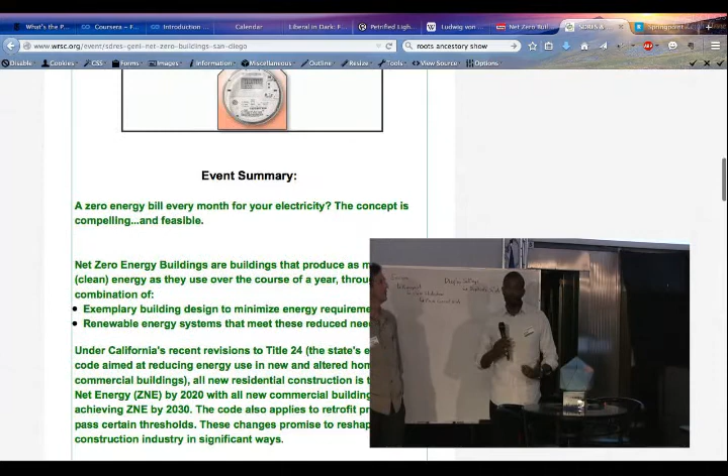What would you like to say to these people to welcome them and tell them what Renewable Energy Society is? San Diego Renewable Energy Society, like Peter mentioned, we're embarking on making San Diego 100% renewable. We're always looking for people to get involved and help us out with the initiatives that we're doing. So if you are interested or know anybody who is, please direct them to our website, it's sdres.org, or you can email me at chair@sdres.org, and we'll definitely have things to do, and we thank you all for coming out.

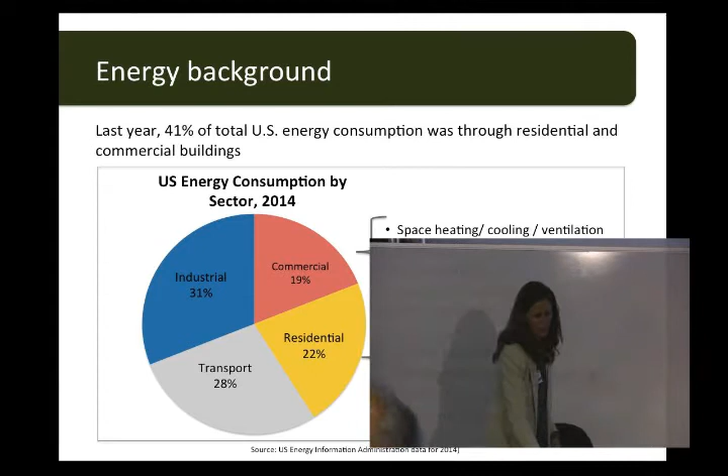Zero net energy buildings are buildings that produce as much clean energy as they use over the course of a year. That's done through two things: one, through different building design to minimize the energy requirements, and Beth is going to tell you more about that. And obviously through renewable energy systems that meet those reduced needs.

Today there are different organizations looking at how many zero net buildings there are. Right now there's more than 150 commercial buildings that are zero net energy in North America. The number of projects is going up. It's not huge yet, but it's growing.

A few data points I found interesting: the first is that 24% of the projects right now are renovated existing buildings. So zero net energy buildings don't all have to be completely new buildings, they can use existing buildings. What's also interesting is that most of these buildings use about a quarter of the energy that average buildings use. That's a big improvement without having to put up solar panels yet.

They can be in all climate zones. We have them here, but you could also have them in winter areas. And they're found in 16 types of buildings, where education is actually one of the most often used ones.

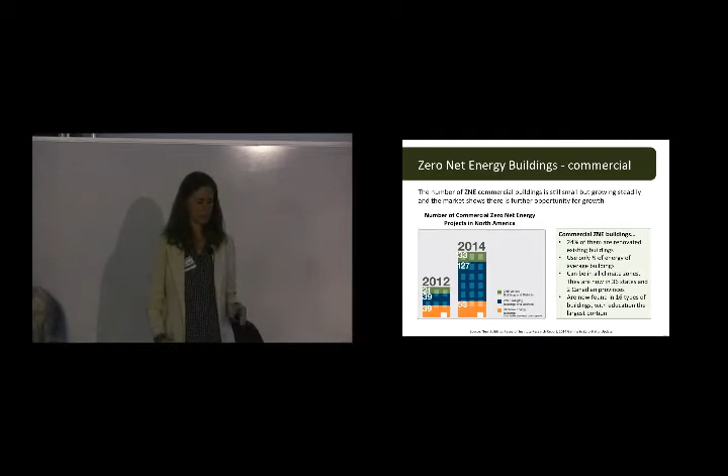In San Diego, we have a few zero net energy commercial buildings. I think the first one, in 2009, this architect firm Hanna Gabriel Wells built their first zero net energy building. They used an existing building, and more than 90% of the materials they used were already there, so they didn't have to set up a whole new building. They use 100% natural ventilation, with design elements and solar panels at the same time.

The second notable office was the DPR construction office. They also used an existing structure, a 1984 structure, and used 95% of it. They managed to change the design to make it a zero net energy building.

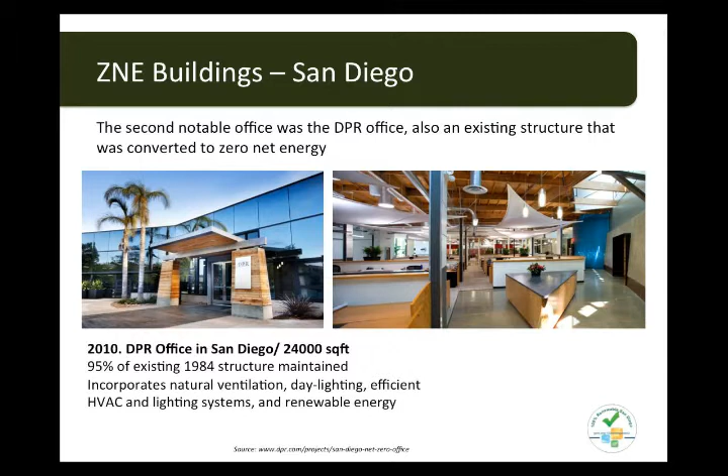And then, most of you must have heard about this: the largest net zero energy commercial office in the country is here also, in San Diego. 13 stories, 415,000 square feet. So it's a big project, and it gives us hope.

In terms of residential buildings, I wasn't able to find statistics on how many there are because people have their own homes and they're not all recording everything. But we see them coming out in the news more and more. There's one in Denmark, there's one in San Diego, there's a few others, there's even an apartment complex, and there's even a community that's supposed to be net zero being built at the same moment.

California is playing a leading role in adopting net zero buildings. If you go online and look for net zero buildings, you see California buildings come up all the time, so that's great.

Through the revised Title 24, there are new goals, and these goals are very ambitious. All new residential buildings are supposed to be zero net energy by 2020, that's in five years, so that's great. And all new commercial buildings should also be zero net by 2030, and at the same time 50% of existing commercial structures should also be there. In my view it seems very ambitious, and I hope we'll get there, and I think it's possible also.

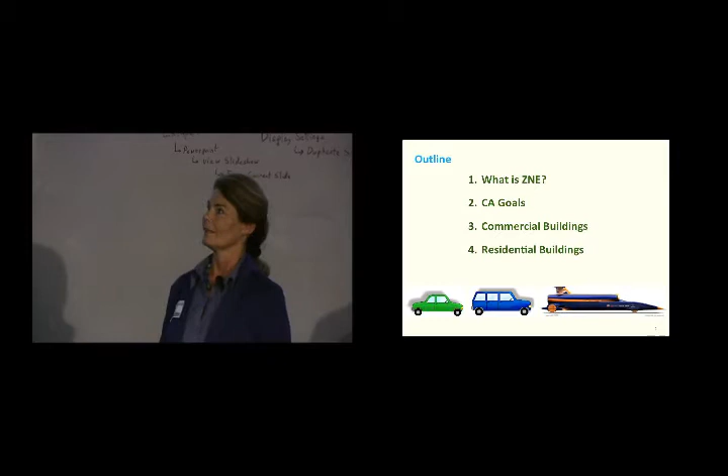Then we'll talk a little bit about commercial buildings and a little bit about residential buildings. If you have questions or clarifications along the way, please shout out. Otherwise, we've got a lot of material to cover, and we will have more questions and discussions after all 3 of us have had a chance to talk with you a little bit.

So let's start with, what is high performance? We talk about ZNE and high performance buildings. You will often hear me say that the path to high performance and the path to ZNE is the same path - the question is how far down that path you go. And what is a high-performance building?

So we've heard about the triple bottom line. I think it's always valuable to remember that it's not just about energy, but this is really about the quality of the building for the people living in it. There's a lot more we can talk about that. We want healthier, and those come from a combination of happier people and lower energy costs. This translates into, of course, a healthier environment - we're polluting less, we're taking less from the environment around us, and in an ideal sense, we're actually contributing back to the health of that. So that's why we talk high performance instead of just high efficiency, because high performance buildings are looking at the entire triple bottom line - healthier people, healthier places, and a healthier planet.

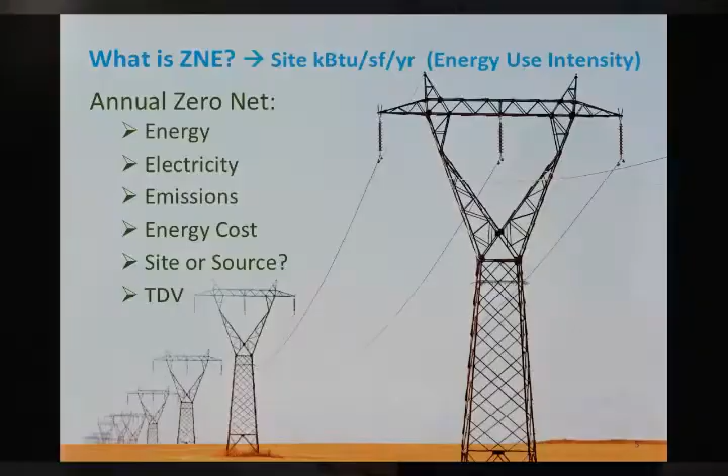What most people look at is a metric — here's the geek part of it — it's site-based KBTUs per square foot per year. We're going to simplify that and call it energy use intensity. The industry calls that energy use intensity, EUI. That is not the definition that the state of California is using for its big, bold goals, but that's the definition that we're mostly using when we're designing for zero net energy buildings.

Other things that you hear in the ZNE conversations — as you looked, Bryony put up a slide from the New Buildings Institute. They are tracking projects that are verified to be zero net energy, and they're using this EUI definition.

And to be verified, it has to have been in operation for at least a year. Most of the time when we're talking Title 24, we're talking about design of buildings which haven't been built or occupied yet. So verified means a 1-year real utility bill that identifies the performance of that building.

We also might be ZNE capable, or ZNE capable might be a building design. As we'll see in our next set of slides, a building can be prepared zero net energy, but then the people in that building might operate that building in a higher intensity way than another set of occupants might.

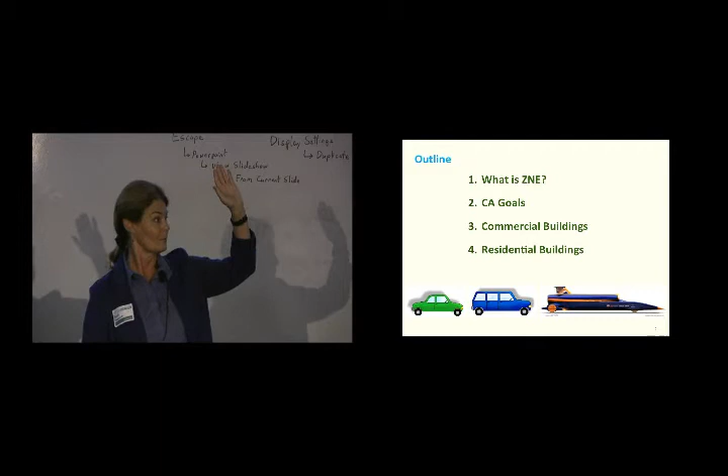If we look at our cars, how many people own a car? Most of us. How many people know when you bought that car what its factory gas mileage rating was? How many MPG was the factory rating for that car? When you had that MPG, did that tell you how many dollars per month it's going to take you to operate that car?

So you can have a building which is designed to be ZNE capable, which is like a factory rating for a building. But then how is that building actually going to operate in real time and in real life? That's like, how do you actually drive your car? How many miles, how much load, how much maintenance do you do on your tires and keeping your engine maintained and efficient? That's a very similar example when we're talking about buildings.

We can solve it at the building scale or at the community scale, and if we can't solve it at the building scale for offset of renewable energy, then we have an option under some metrics to go outside and buy, in effect, renewable energy credits. So let's say on my site it's too tight, I can't put up enough PV on my roof to offset the electricity of my building. So I'm going to buy some portion of someone else's renewable energy somewhere else. That's called a renewable energy credit, so the electrons balance out, but not on the site.

And then ZNE verified is when it's actually been proved after a 1-year period of time.

Brianna already talked about the big, bold goals for California, and you can see that this is just emphasizing that there's our new construction goals and the existing building stock goals. I think new construction is crucially important, because what it identifies is what's the potential of design. If we just look at existing buildings and say, wow, how do we make them better, this just feels like a hill to climb to most people.

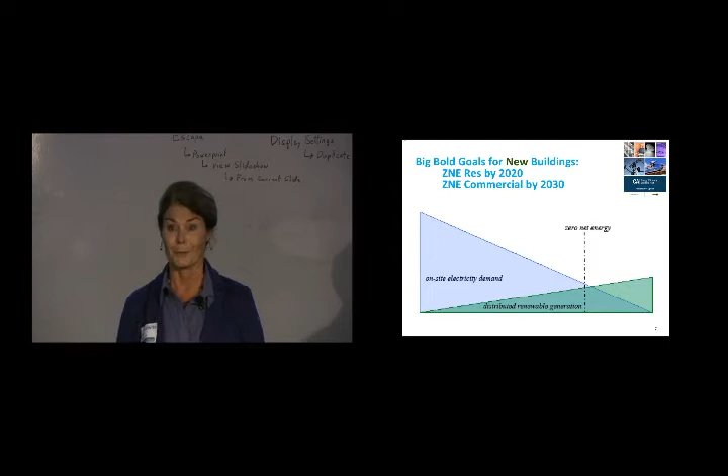How do you retrofit the energy efficiency, drive the efficiency down? How do you take a roof that's already cluttered up with mechanical systems and pipes and get clean space to add renewable energy of any kind? So it's a tougher problem to solve with existing buildings. New buildings show us what's possible. But of course, almost all of the building stock out there, almost all of that energy pie in the country that's being used by buildings is being used by our existing building stock. So what are we going to do about the existing buildings?

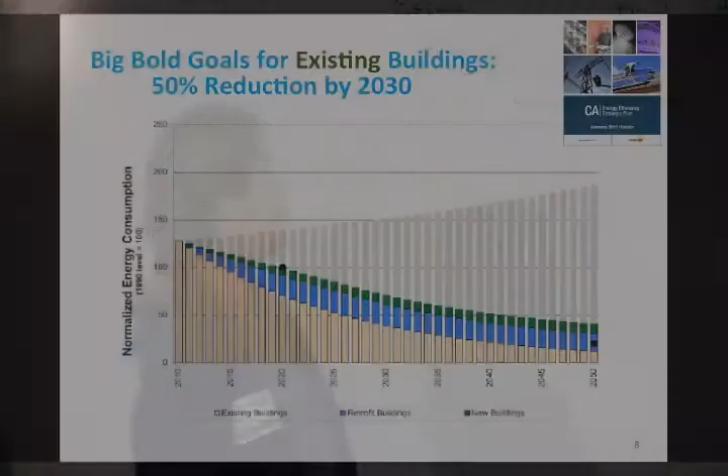Whatever we're looking at, we're going to find the same themes. How do buildings do this? Bryony gave us a look forward. First, we've got the efficiency that's embedded in the design of the building itself: how it's sited and oriented, its geometry, its openings. Then we have efficiency that's embedded in the equipment, so here's what the building is before someone comes into it. Then we have the efficiency in operations, a combination of facility management and tenant occupant behavior. Then we can identify what the meter's going to see for the energy use of that building, and we want to offset that with renewables.

Okay, that's 10. How did that happen? You have 2 10s, Beth. No, that's not my presentation—somebody else's. Yeah, these are not from mine. That's what happened, I apologize. That's okay, we'll get that fixed. All right, actually I have 3 10s, 30 slides, right?

This is interesting because it gives you a sense of how much difference it makes. We talked about the efficiency that can be embedded in the design of the building, the design and construction. So let's say that in general, 50 to 60% of the potential energy performance of the building is embedded in design and construction. Then another big chunk is embedded in the operations—how well that facility is maintained and controlled and kept up. And then another big chunk is the way the occupants use it.

So just to be aware, when we're talking about zero net energy buildings, part of what makes it tricky is that the design industry is used to dealing with the design piece and not knowing much about the operations piece at all. And the building stock—we tend to focus on maintenance and not pay that much attention to the occupants. So just be aware that all of these pieces need to come together to get the most cost-effective options.

And when we can't get the most cost-effective options, then we're still going to do what John suggested and say, okay, so where's the real world number that we can get? And that's the number that we need to offset.

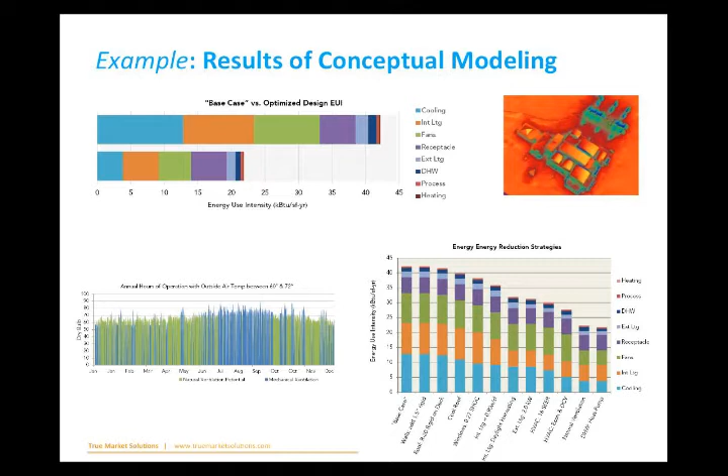If the glazing is improved, can the air conditioning system be smaller? If something's at the end of its useful life, that's the time to change it out, not just to the code minimum, but to something more efficient as a package.

This is part of a natural ventilation study. This is part of identifying how much insolation is available on that site so we can identify its potential for renewable energy.

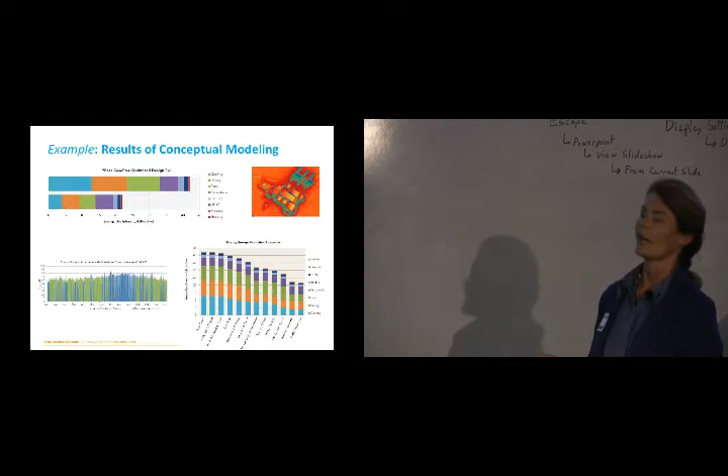This is calibrating the model to the actual utility meters. Once we have a good match, we can translate that into the end uses so we know for that building, with its real occupants, its real weather, all the things going on in that building - not just what the meter sees, but which part is heating, cooling, lighting, fans, receptacle loads. Then we know what's important to look at, and we have high confidence that when we start changing things, those cost savings will be what was estimated.

That's just so I know they can't see that from far. At the bottom here, I see kitchen and IDF - that would be a data server, and this particular building had a cafeteria. Energy model walk-ins and a receptacle, heating, cooling, lighting, exterior lights, under counter lighting, fans, pumps, and DHW - domestic hot water. So that's the levels you see there.

So it's just kind of a peek into the cool stuff that modeling tools can do.

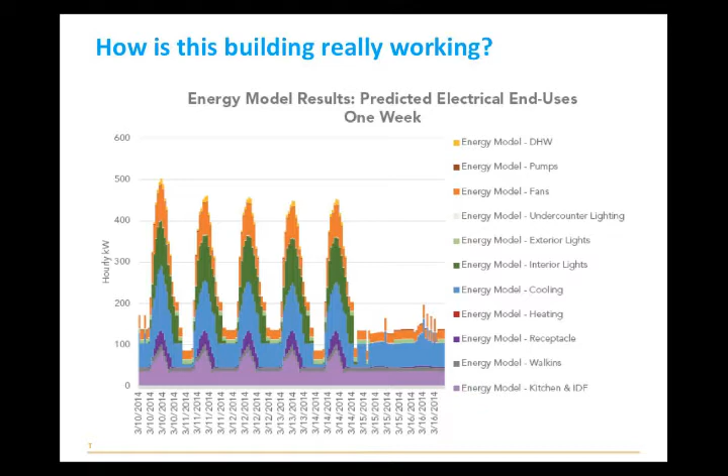This was an actual 4-story building that we did this analysis for. It started out with - remember EUI? What does EUI stand for? Energy use intensity, right. So the EUI of this building, it was a 2007 building, modern current standards, very well maintained, had active facility management, had an EUI of 85.

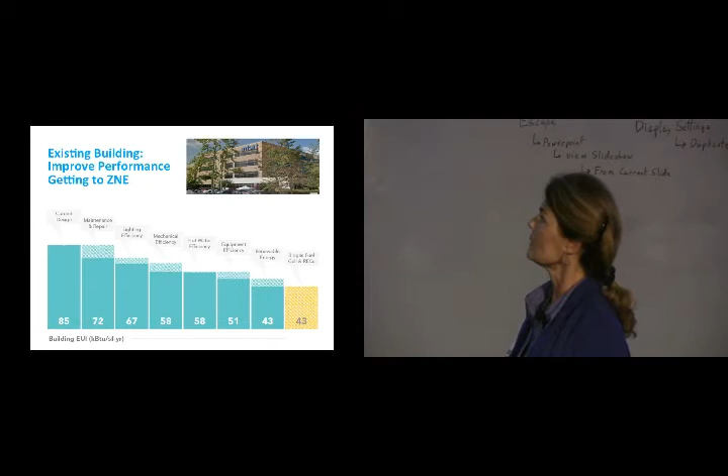With a little bit of maintenance that they couldn't see because they didn't have the right dashboards, they could bring that down to 72. There's other lighting efficiencies they could bring in to bring this down into the 50s. They could do deep retrofits on equipment to bring this down to the low 50s. For energy use potential, they wanted to know what it would take to make the building zero net energy. So these are low-cost things identified just by the process, and these are longer-term capital improvements over time.

Because it's a 4-story building, one thing you might have noticed on the set of buildings Bryony had up to begin with - not every single one, but most were low-rise buildings, 1 and 2 stories. The higher story buildings, there's just not so much roof area. So unless there happens to be a lot of site available somewhere else, most zero net energy buildings you're going to see right out the gate are low-rise, so there's enough physical footprint for the PV panels to be located somewhere.

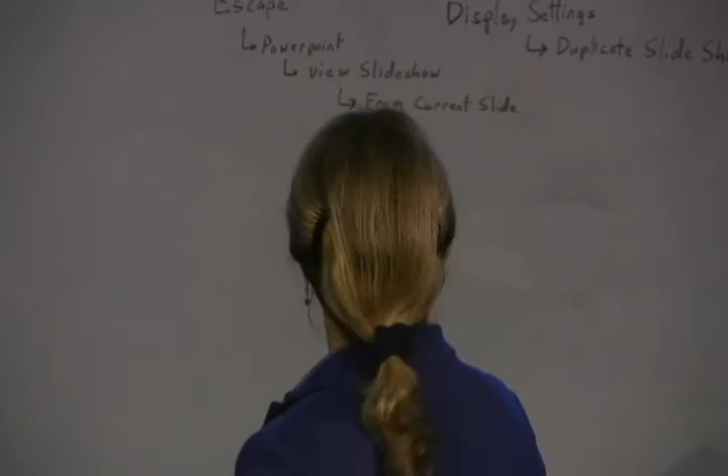And when we get to the clock - let me just say while I'm thinking about it, because I'll forget later - the LPL building you identified in San Diego, the very tall white tower, that was zero net energy. All of these buildings have stories - they have geeks and numbers, but they have stories. The story behind that one was that they were doing it with a fuel cell, which is a great idea. They did reasonable efficiency, then added a fuel cell.

Fuel cells just by themselves are not necessarily renewable. Their plan was to use biogas instead of natural gas for that fuel cell - it's not necessarily even an energy saver, it might be a cost saver. But right now, the state of the industry is such that it's really difficult to get a stable contract to continue to buy biogas over time. So it claims to be a Zero Net Energy building, but it's not a verified one yet. But it's good because it's set up for forward planning, so that when those contracts become available, it's ready to go right into it.

It's kind of like the energy equivalent of dual plumbing your building even before you've got reclaimed water that you can use. I need to speed up a lot here.

This is just a visual example drawn from one of the buildings shown earlier - a 5-story building in Seattle. So how could they put enough renewable energy on their roof to get to zero net? What they did was drive their energy intensity down, down, down, down, because the owner just wanted to prove it could be done.

They won't tell us how much it cost. Most of that cost was frankly in materials, because it was a living building, meaning there were no materials on the red list, as well as zero net energy and zero net water, to your point, Dan.

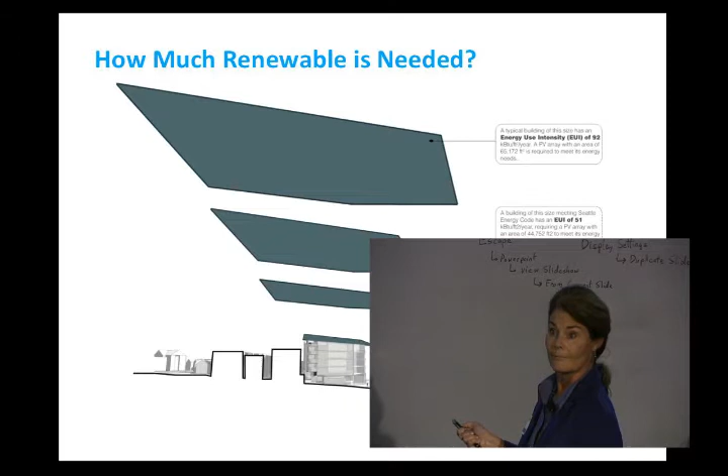But it's a great story, it's a case study. This is the building as it is. This is how much roof would have been needed if the building had been a code-complying building. So this just gives you a graphical idea that by making the efficiency better, the size and cost of the offset renewable energy also comes down, down, down.

This is the HGW building, the first one in San Diego. We helped develop this one. This is an example of another one, an office building. And there's a story there that you can ask about in questions and answers.

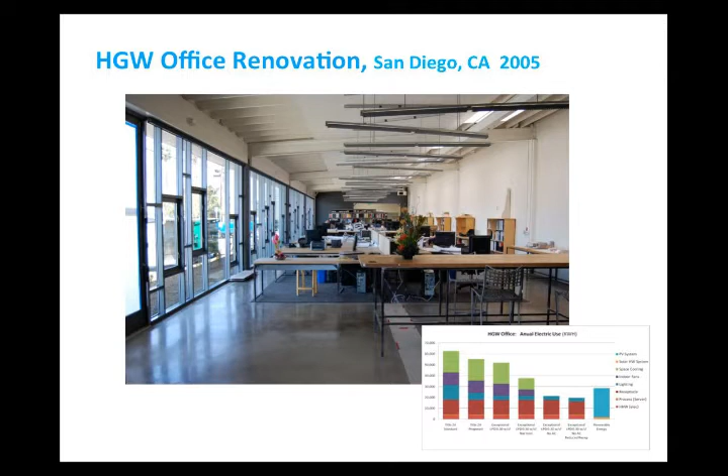The County of San Diego has a strong goal for Zero Net Energy buildings. This is one of the ones they've committed to at this point. So that's just kind of a range of commercial buildings.

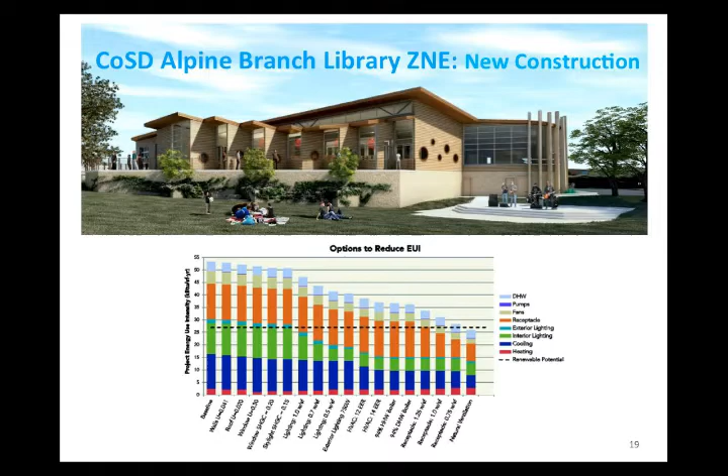I'm going to just stop here. This next set I had was on residential, but the ideas are similar, and we've been talking about these ideas. I want to make sure that Phil and Bill have time, and I want to hear what they have to say too.

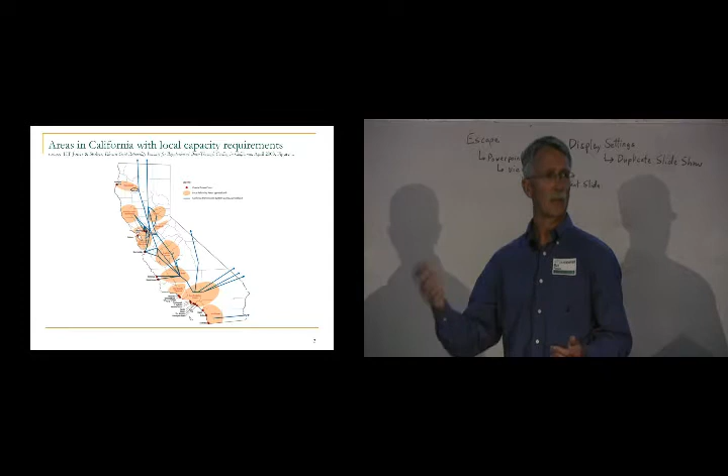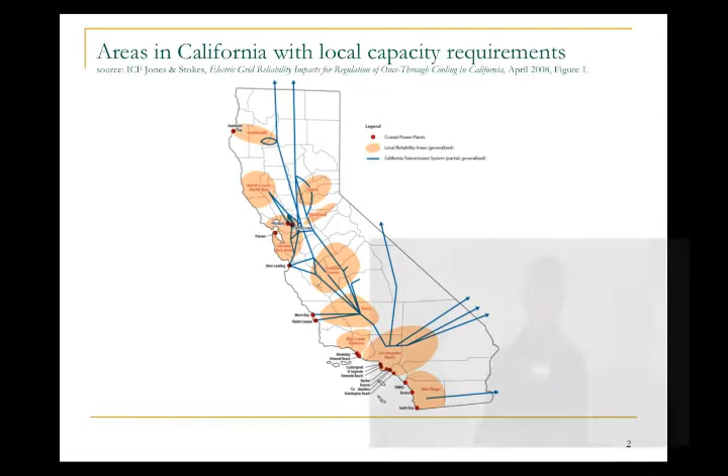What's been happening, and I'm sure many people here are well informed, is there's a major energy debate going on even in our own county about building more gas turbines - Pio Pico, Carlsbad. At the same time, we say we want to maximize renewable energy. That's slide 2. Much of the debate at the state level centers around building most of our renewable energy to the right of those two lower splotches, which is the LA Basin and San Diego - putting the renewable energy outside of the load pocket, building it here, building it here, then building transmission lines to get to it, but building gas turbines here because we didn't put the solar there. So there's no solar to help us when we lose the transmission lines on that hot day. That's basically the debate we're having at the state level.

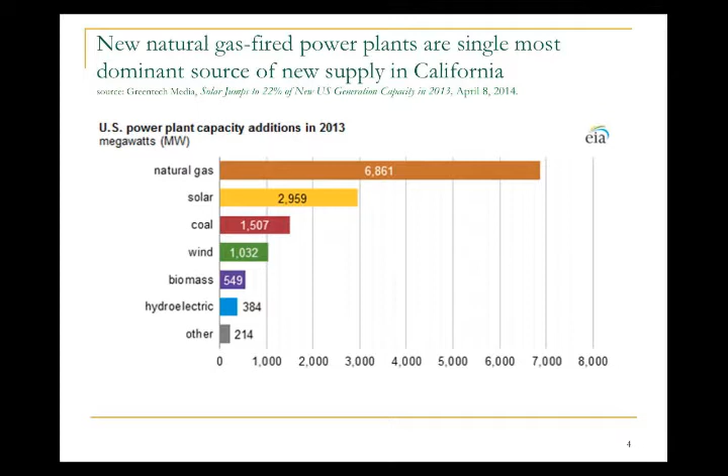And so we get Pio Pico approved, even though most people would like to see a lot more of this - parking lot solar, rooftop solar. This slide, number 4, shows that in the United States in 2013, almost 7,000 megawatts of gas-fired generation were built. Go to the next slide - 4,000 of it was built in California. California by itself is carrying the gas turbine business in the country. We're building a lot of solar - that's what this yellow is. We're building a lot more gas.

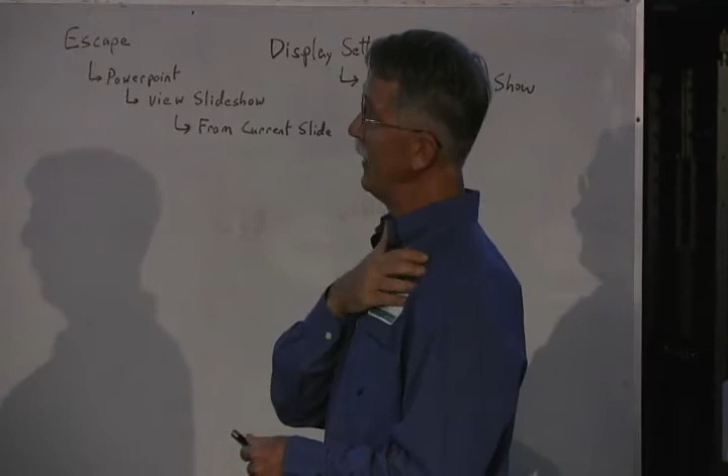And in fact, we're building two separate power systems in California. We're building a completely conventional gas-fired transmission-based system, and on top of that, we're building a major renewable energy build-out. That's one of the reasons our rates are going up so quickly - we are paying for, in my opinion, a somewhat redundant system. I noticed Beth put some transmission lines up there in her presentation, and that's really the opposite of the ZNE model. But what's happening at a state policy level is we have the governor saying we want to go further than 33% renewables, we want to do more than that, and we haven't defined how we're going to do it yet.

But it has a lot of life, and this plan includes numerous alternates. The preferred alternate is alternate 13, but it involves building 13 500 kilovolt lines like the Sunrise Powerlink from these solar development centers in remote areas.

And so this is a serious challenge to the concept of the future, which is based on buildings, on urban solar development. I pointed out already where these load pockets are, and currently we just built a 300 megawatt gas plant right down by the border. We will decide within a few weeks whether to build a 500 or 600 megawatt gas plant at Encina.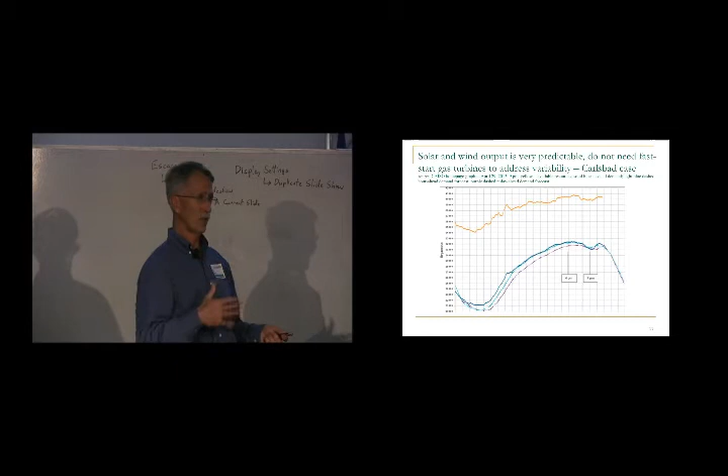You don't need to build that to deal with a load that we can predict 24 hours in advance. And the idea that in San Diego, we're probably approaching 60, 70,000 rooftops with solar spread over 1,000 square miles, no cloud or even a bank of weather is going to have a dramatic impact on our output. It's too diffuse at this point. So those are red herrings as far as the gas turbine need.

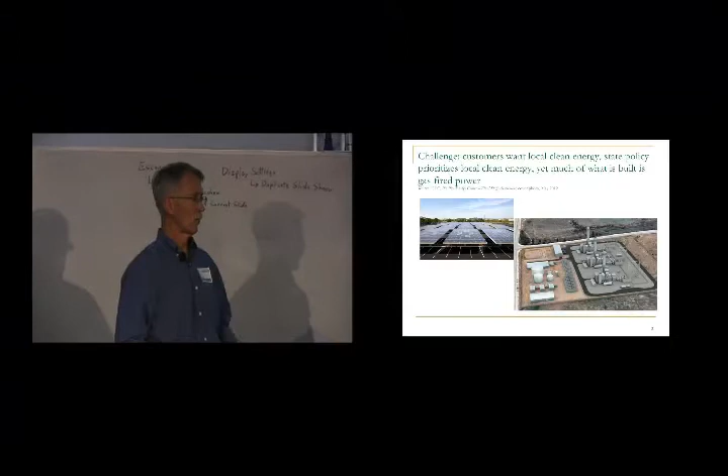Isn't Tesla working with that, making new lithium batteries that will actually store your solar so you don't have that problem? That's also an excellent point.

In the case of Encina, where the commission I gave testimony in this case, the commission's supposed to make a decision in a week or two whether to go with a gas plant or say no gas plant, we're going to punt back to the loading order. And we want SDG&E to review bids to do that job with energy efficiency in gas, demand response, or rooftop, or what we say we want to do as a state.

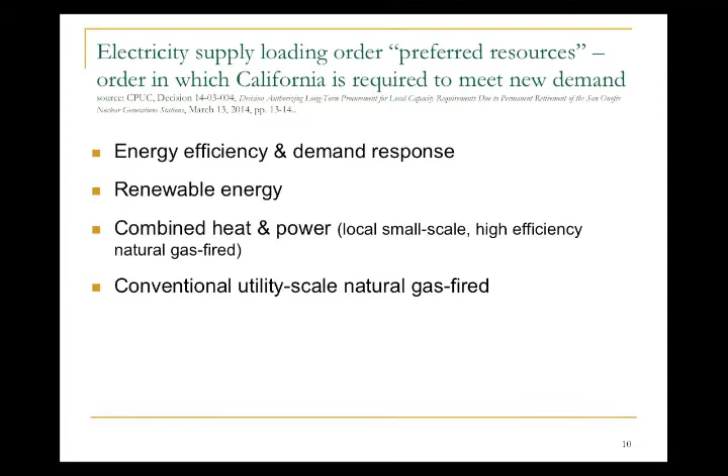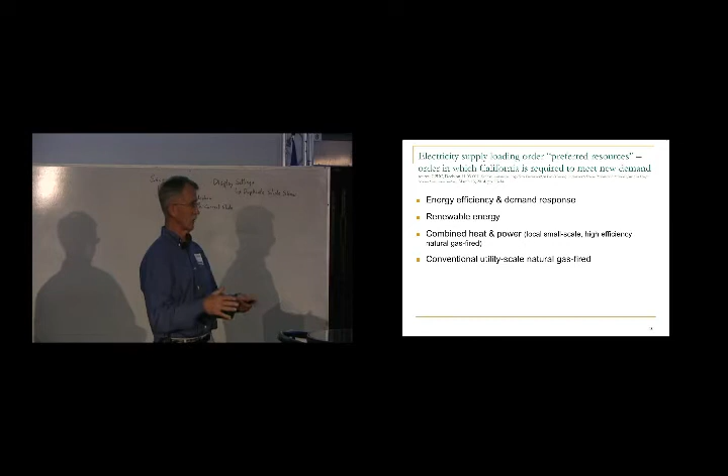And even Shell Energy's testimony was about energy storage and the fact that if you're concerned about wind fluctuations or solar fluctuations and meeting rapid shifts in demand, you don't want a gas plant, you want a battery, and that it should be energy storage. I'll talk about that a little bit later. On a policy level, that's where the state's going, that energy storage batteries, at least at the coastal plants, displace gas turbines. But the politics are still heavily in favor of gas plants.

Well, in an individual home, for instance, I don't know how many batteries you'd have to have, but you use batteries on boats all the time that keep the boats going for 24 hours, no problem, 48 hours, no problem. You have that at your home, don't you, Bill? Yes. So talk about your house specifically.

I actually kept my house out of the slides, just not to be banging the drum too much. But go ahead and brag.

I live over in University Heights, a couple miles from here, but we don't have a feed-in tariff in California so that we could cover our rooftops with solar and feed the excess power back to the grid and get paid some reasonable amount for it. And so since we now have reasonably priced electric vehicles, what I did on my house is set it up with enough panels to cover the vehicle and the house, with the vehicle being the load that is making the batteries pay for themselves.

The way it's set up is, it's not a zero net energy house. We got double the amount of solar production we need to be zero net energy, but half of that at least is going to the vehicle. And the idea is the delta between the cost of a gallon of gasoline and going the same miles with a kilowatt hour of electricity is big. It's much more cost effective to do it with electricity.

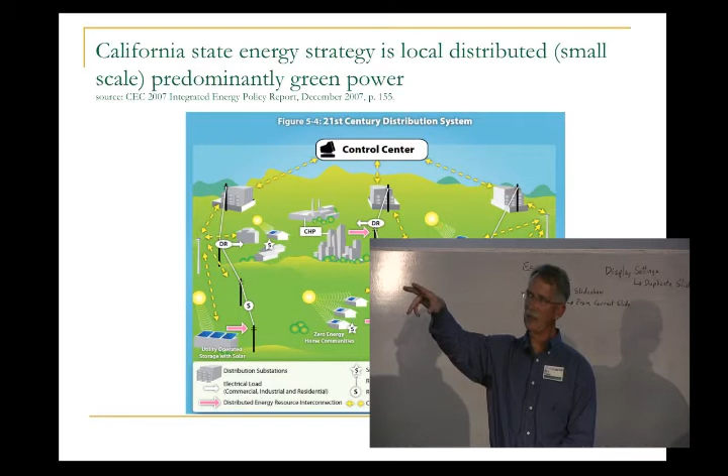Our policy on energy is excellent. For the last decade, state policy has been that we're going to do it at a local level. This graphic on page 13 is from a 2007 California Energy Commission report. It shows solar panels on the roof and batteries, everything we aspire to for a self-contained microgrid approach. The California Energy Efficiency Strategic Plan, which Beth referenced, also covers existing buildings: 25% of existing residential gets to near net zero by 2020, 50% of existing commercial net zero by 2030. That's a very big deal - that's retrofitting all of our existing structures.

Southern California Edison, the utility to the north of us, has a pilot program going now, 300 megawatts, to meet new load in the urbanized portions of their territory adjacent to San Onofre nuclear power plant. The stated objective of this pilot is to eliminate the need for gas-fired generation to cover this same need, so that energy efficiency, demand response, rooftop solar, and energy storage will permanently supplant the gas-fired generation.

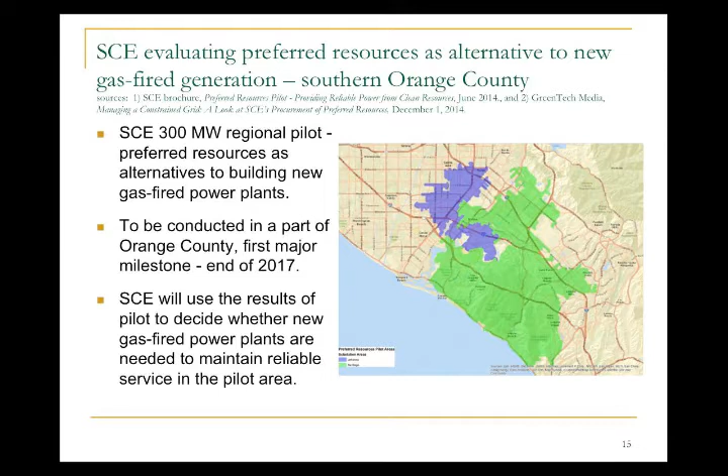Beth also used this graphic showing commercial building net zero energy conversion, where 50% of the building stock reaches net zero by 2030. I used this as the basis for a project I did for the San Francisco Bay Area, looking at what if we keep going. In 2030 we're at 50% - what if we continue at a linear rate and hit 75% or 80% of the buildings? Because we've already got 25 to 30% of our electricity supply as renewable, at about 2035-2036 we hit 100% green, just following that track on net-zero-energy buildings and the existing remote renewables we have.

So we have excellent state policy. The politics and political power are really behind the conventional approach - transmission lines, gas plants - and that's one reason we're building two independent power generation systems: a conventional one that is gas-fired, and another that is renewable energy driven.

However, some recent legislation like AB 327 was supposed to put the silver spike into net metered solar for rooftops. But because the industry and its supporters were strong enough, we tripled the net metering cap with that legislation, and we're now building gangbusters on rooftop solar. That wasn't the bill author's intent - it just was the way the politics worked out.

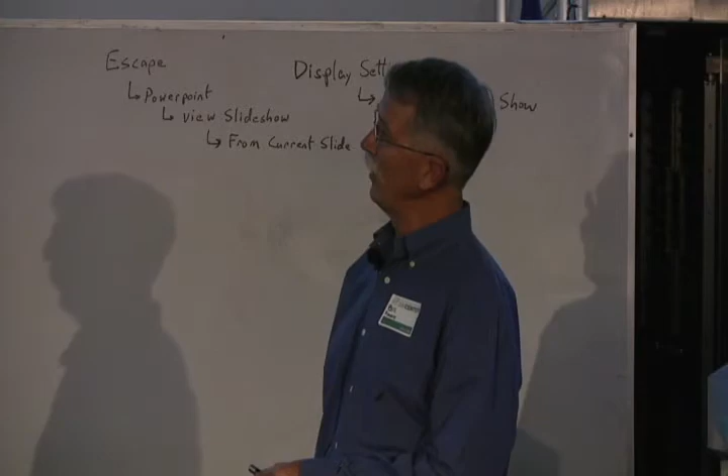If you listen to the radio or the ads by solar companies in San Diego, they'll say you need to move now on your solar project because the law is going to change in a year, things are changing, move now. This law that was passed really bumped up all of these rooftop solar installations, which are a significant part of a zero net energy building.

One thing that isn't well known about this law is it also codifies the idea that this industry is supposed to grow sustainably, meaning when net metering ends, this customer-sited renewable distributed generation continues to grow sustainably, meaning it doesn't just drop at 2017 or whenever we hit that target. That's important to both know and to advocate for, because there will be a lot of pushback to try and ratchet down what is happening.

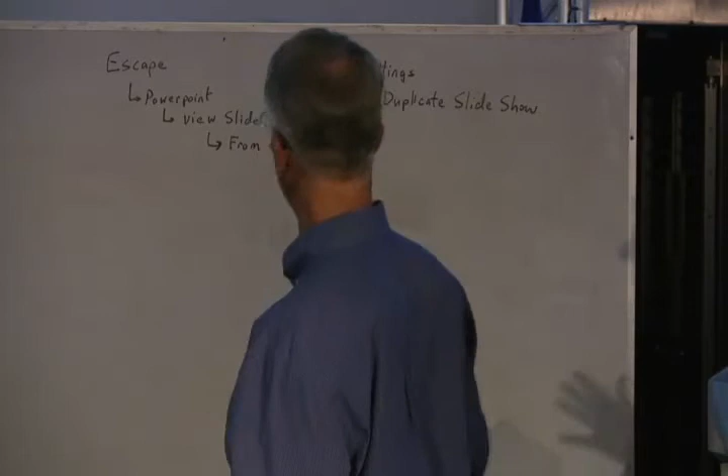Because if it continues at this rate, the zero net energy concept will, just by pure momentum, start to dominate the electricity supply system, which I think would be a great outcome. But there are many battles yet to be fought on that.

The only other major point I want to make is about economics. The main pushback from the utility side is that, well, obviously putting solar panels on an individual building can't possibly be as cost effective as putting it in a 100 megawatt array in the desert. And that's true within the fence line of the array in the desert or around the building. But this is a table I just put together, and it's approximate: cost of utility scale desert solar versus commercial rooftop urban solar. Cost benefit deficit, put it in terms of dollars per kilowatt hour, maybe 1 cent.

2 or 3 cents of difference maybe, advantage desert solar. But if you have to build a transmission line to get there, like the Sunrise Powerlink, it costs $2 billion, and your capacity factor is 25%, meaning 75% of the time you're generating nothing. Then just on a dollar basis, this would be the equivalent of 9 cents a kilowatt hour to get it from Imperial County to San Diego.

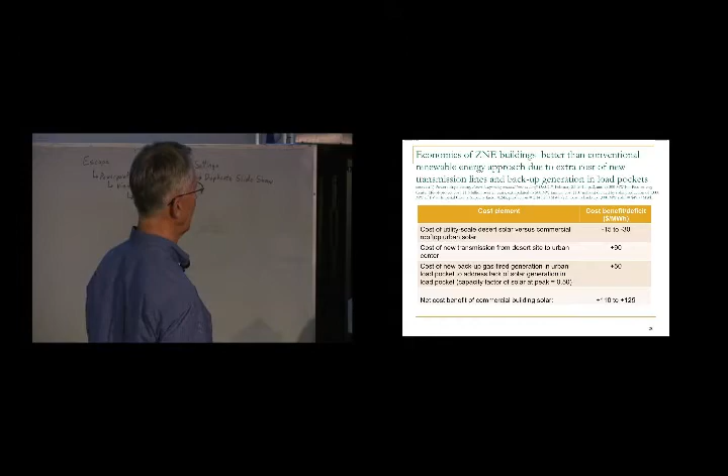If you didn't put the solar in San Diego, so that when you lose a transmission line, you have no power from that resource, and you have to build enough backup generation to cover what you would have gotten from the solar that was on ZNE buildings in San Diego, you add another 5 cents a kilowatt hour to the cost of the solar in the desert. To the point that if you looked at it in the big picture, you would not concentrate on putting solar out in the desert because of all of the ancillary expenses that go with it. So we have this battle going on, but we also have the governor doing some good things.

This January, in the State of the State address, and I think this is in his executive order as well, doubling the efficiency of 50% of the state-owned building stock, and now presumably of the entire building stock in the state. That's a huge step toward zero net energy on a broad scale.

This is just a summary of major legislation on energy storage, battery storage, that is requiring the utilities to put in substantial amounts of battery storage. And really, for these battles over individual gas-fired plants, the preferred resource that is the number one candidate to displace it is battery storage and energy storage.

And entities like Electric Power Research Institute are coming out with reports saying that battery storage is less costly than gas turbines for the same application, which is just building the momentum behind the idea that if we put in new large utility scale systems, they would be batteries and not gas-fired generation.

But the bigger context, and I think many of you are probably quite aware of this, there is a once-in-a-generation controversy going on at the commission, at the state level, the California Public Utilities Commission, that basically controls which way we go on energy. Their president left recently. There are numerous investigations, and what it has to do with is a far too cozy relationship between the appointed commissioners and staff, the commission, and the regulated utilities. That's going to shift this year. It's too big a scandal for business as usual.

This opens up more space for something like the zero net energy concept, which we've had for a decade, but haven't really accelerated to the degree we should based on its status in the policy firmament at the commission. There's going to be a shift this year at the commission, and the playing field is going to level out more than it has in a long time. So it's an excellent opportunity to push on the zero net energy concept for a lot of reasons, economics for one, but also its time has come. The stars are lining up to make it happen faster than I thought, especially with what's happening at the commission. So that's my presentation.

Thank you. The last three up here, if you want to finish them out. The last three are here in San Diego and all over the state, really.

One alternative to the utility providing supply is community choice aggregation. I'm sure most people here are at least somewhat familiar with that concept, but let's assume you're not.

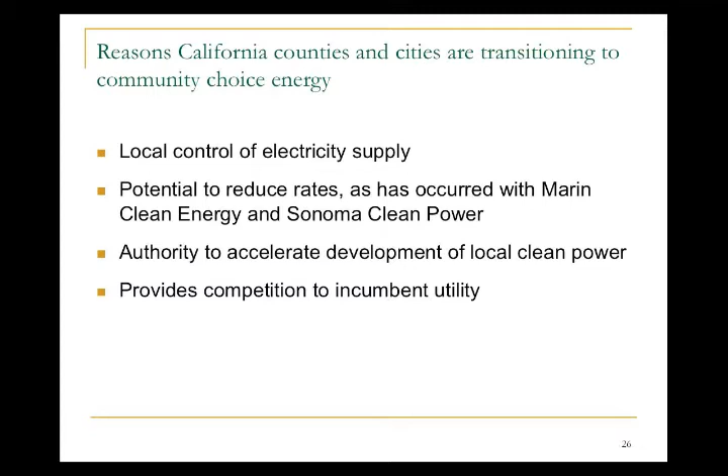Many of you are aware that our rates are going up fast—we're getting hit with major rate increases and shifting of rates. The question is, other than the issue of renewable energy, which the zero net energy concept addresses, why in an era with no increase in load are our rates increasing so fast to pay for things like transmission and gas plants? It's a good question, and this is a tool that would allow us to concentrate more on developing the renewable potential in the city of San Diego.

What is the answer to that question you just posed—why are the rates going up?

Well, the question is, for example, I pointed out the Pio Pico gas plant and Sunrise Powerlink transmission line as examples. We have many major infrastructure projects that are in the pipeline or have been built, and those costs are now in our rates. The reason for mentioning the Utility Commission and for mentioning that we're building two parallel systems—we could shut down all the solar panels in the state today and we wouldn't miss a beat, because we've built so much gas. We can shut down the nukes, we shut down San Onofre, because the commission has been so accepting of very conservative growth projections, and the utilities say we need gas plants, and they go, okay, you get the gas plant. We need another gas plant.

What's the problem then with supporting the grid that we hear about? In other words, what's all that about?

The grid does need support, no question about it—it's a 24/7 grid, but it's the wordplay. I can say this because I've been working as an expert witness there for 10 years. It's kabuki theater where, yes, a gas plant can handle that swing load, but we have many resources available to us that can handle it, and we do it every day. We handle these load changes every day, including what is now probably north of 10,000 megawatts of solar and wind. It's here, and we're handling it with our existing resources. So the game we play at the commission is, why can't we use—this is me talking—we have a 50-year-old gas plant at Encina, 1,000 megawatts of gas-fired generation, absolutely reliable.

Number two, if you want to really have an impact in the short term, all of this is decided at the California Public Utilities Commission. They have the power of God over what direction we go in. They are in a state of major flux at this moment due to scandals that have evolved out of the San Onofre settlement and the San Bruno pipeline explosion.

Who is the Speaker of the Assembly of California? Toni Atkins — this is her district. Toni Atkins wields great power, and Ben Hueso, senator right down the road, is chair of the Senate Energy and Utilities Committee, which oversees the commission. Just let them know that we want transparency. If you get transparency at the commission, we get to a zero net energy future much faster than now.

The problem is, and this happens with many commissions that regulate select industries, they frequently become captive of those industries. That's where the commission has been. But that may not be where it will be in 6 months or a year, due to this. The politics of this is so overwhelmingly significant — it's a great time, if you know Toni Atkins or Ben Hueso or any of these electeds, as they are deciding this week, next month, in the next 3 months, on reform legislation and more transparency. Just picking up the phone and saying 'I want a more transparent PUC' will accelerate this process.

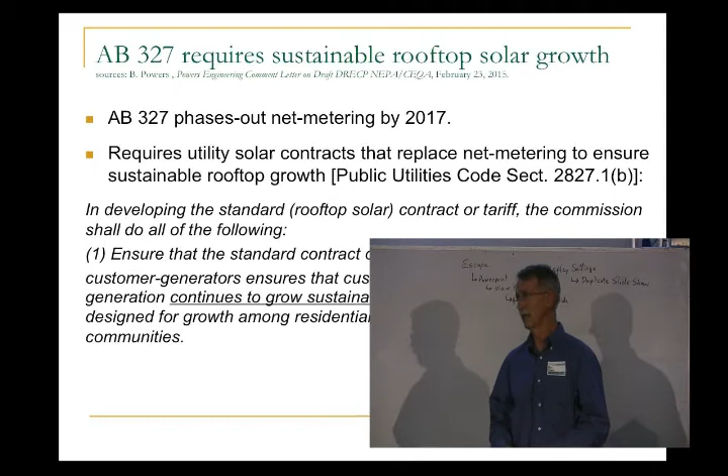One more with Eric on here. Hi, you had mentioned one of the comments you were making spurred some thought. You had said something about the unfortunate specter of building $50 billion in central distribution and transmission infrastructure unnecessarily. Was wondering if you could explain a little bit more about what goes into that number, and also if you could give an estimate - let's say miracle of miracles, right now today the entire built environment in the San Diego region was net zero - what amount of stranded costs would we be looking at in existing central generation and distribution infrastructure?

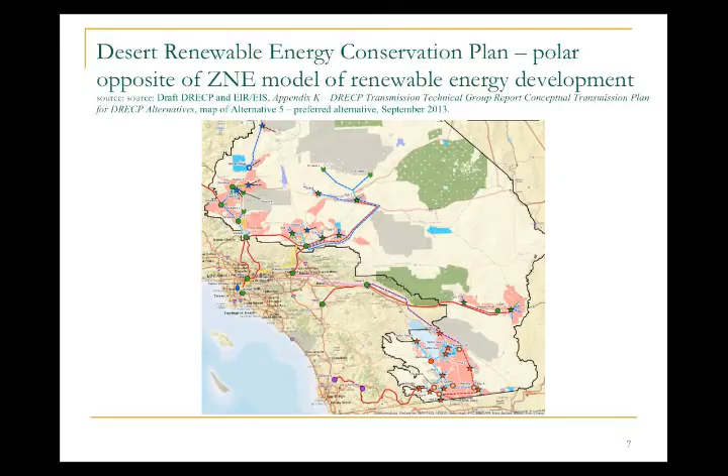I'll try and answer that. The first one is pretty easy. The slide's not up, but in the plan that the state has floated for putting 20,000 megawatts into the desert, they are explicit that this will include either 13 or 14 500 kV transmission lines, new lines. Our experience locally is with the Sunrise PowerLink transmission line that was energized about 2 years ago, and the final price on that was $1.9 billion, approximately $2 billion. So the basis for an estimate of transmission, just the highest voltage transmission cost, would be 2 billion times 13 or 14, so somewhere around 25 to 30 billion. And then that is amortized at 5 times that over many years.

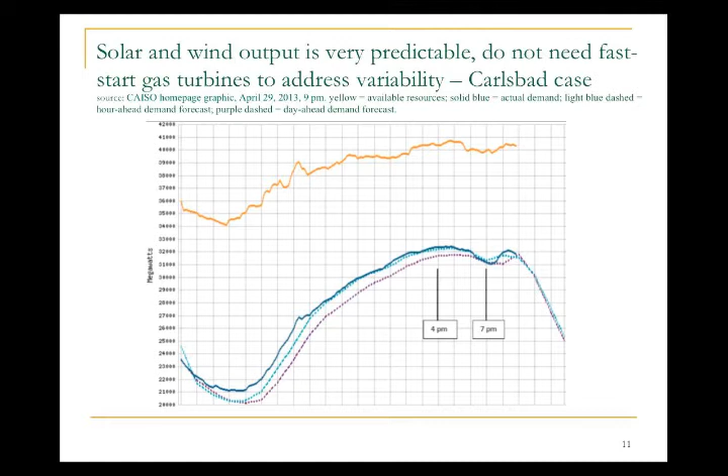The issue of the built environment - say that we shift gears, we don't do any of that activity, and we just build in San Diego to achieve the same effect. If we don't build that, then there's no stranded cost because we didn't build it. But where I would see stranded costs, not so much stranded as unnecessary - if you're going to put 5,000 megawatts of Kyocera panels in a remote part of Imperial County, you could just as easily put that 5,000 megawatts of panels on rooftops and parking lots in San Diego. There's available square footage to do that. You're not stranding that transmission line, but you didn't need to build it if you went that way. So you're eliminating that cost.

The same is true for the gas turbines. If we're putting the solar in San Diego and we accept that the solar is going to be available at some level in the afternoon, say 60% of its capacity rating, then we don't need to build duplicate supplies to cover that 60%. It's going to be there. So I consider all these gas turbine projects in the pipeline as essentially not stranded because they will be used, but it's a fork in the road. You're choosing this fork, and if you didn't choose that fork, you wouldn't have to put the money into it. You just go forward with this leaner, cleaner, less costly route.

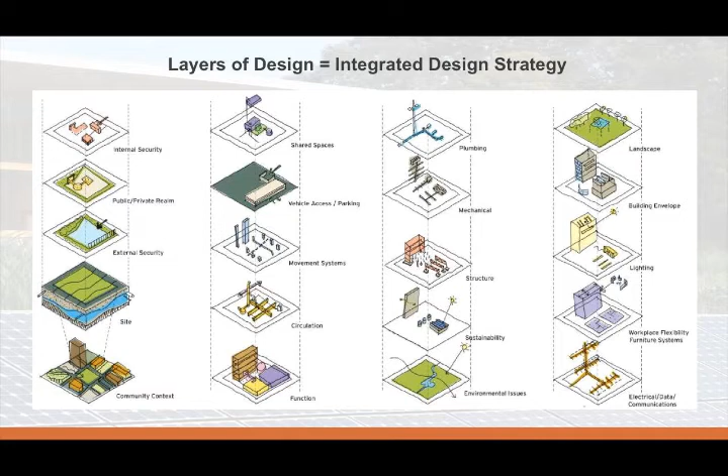We use the philosophy: no one knows as much as everyone. So we are collaborative. When we meet with a client, we bring the consultants in. There's a thing called design build these days that is a forced marriage between the architectural engineering industry and the construction industry. It has very much positive potential, and it can have its struggles. But we bring the whole team together before we start designing. Wherever we can, we have the contractors, subcontractors, plumbers and electricians, because nobody knows as much as everybody. So why not start there? It makes a better building.

We do not seek to imitate nature, but rather find the principles she uses. That's a Bucky Fuller quote, in honor of Peter.

So there's more to come. If you have questions, we can start now. Just a second, Eric. I can talk loud. I was wondering if you could tell me...

So it's an integrated full system, right? The approach is to really think of all of those things when designing a building - when thinking about the roof, the doors, which way the building is orientated, where the windows are, where the front is. They called it feng shui in a day - it's really energy feng shui. It's about appropriate design so the natural environment around us supports the buildings that we live, work, and play in, and we can enjoy the front yards and backyards in those ways.

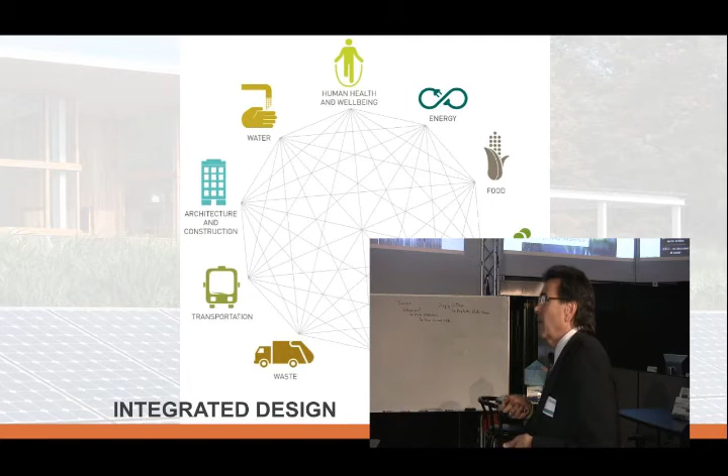This approach includes life cycle analysis as a piece of it. As we've gone on, what we've learned over the years is people don't trust that this stuff really works, so they want the numbers. So we started putting sensors in all of our buildings, we started putting dashboards in all of our buildings. And now when we're done, the building, like a car, can tell us how many miles per gallon, how far we went, how much water we used, and how much water we flushed down the toilet.

And we have the ability to know those things, so we can test them. As time has gone on, on most of our buildings we've done what they call post-occupancy evaluation. We don't generally get paid for that part since the design and build is done, but clients are happy to have us come look at their building to help assure them they're on the right track. So we come back for lessons learned a year later and two years later, and that's where all that data gets published in the books we write about the buildings.

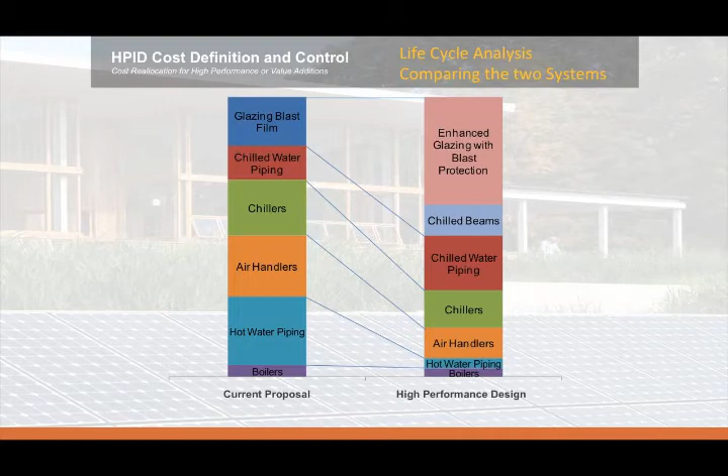They're more efficient. For example, the air handlers you put on the roof of a building—those big huge things that often spoil the look of the roof—are very costly to operate. What we want is not to use them; we want to turn them off. So we have naturally ventilated buildings, chilled beams, and we use hot and cold water from other passive sources if we can.

So the building may cost the same. Like I mentioned for the building in Sereno Valley, under $300 a square foot—there's not a lot getting built today for under $300 a square foot. So you can build it, it can be a good-looking building, it can be highly functional and high performance, and it won't cost you a dime more than if you did a bad job. That's kind of cool.

So again, as we put all those sensors in the buildings, they give us metrics. Net zero by the numbers is what the next series of slides are about.

At the Department of Natural Resources in Missouri, once the building was completed and everyone moved in, after a year they had 9% reduced absenteeism. As they agreed to pay for the LEED Platinum certification, they've also now enjoyed a 60% energy savings over what they used to pay.

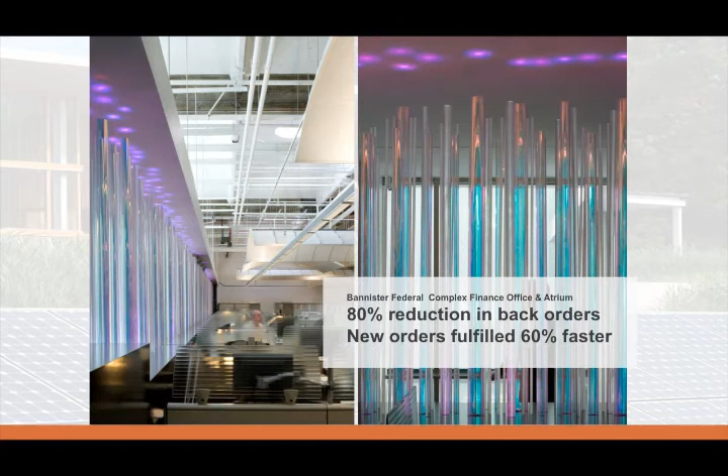At the Bannister Federal Complex Finance Office and Atrium, there was an 80% reduction in back orders, and new orders are filled 60% faster. So people are motivated—it's all natural daylighting, full of windows, so they don't have to turn the lights on; they can work in natural light. There are plenty of studies, especially in schools, showing how humans perform better when in contact with natural sunlight. We tried it out, and it turned out to be true.

At the Heifer International headquarters, there's 45% energy savings and net zero water—though it depends how you use water. Water elements on a site, like fountains, we sometimes think we should turn off because they waste water, but that's a bad attitude, because we need water around our buildings. It humidifies, cools the building, and reduces the heat island effect. So water elements can be very positive.

The thing is, this water wants to be rainwater that stays, not domestic water. From our perspective, the only thing domestic water should be used for is drinking—no toilets, no sinks, no washing, no showers, no laundry, just drinking. Secondary water that's been filtered—and we'll get to some slides on those techniques—can be as good, clean, and tasteful as normal tap water by recycling and reclaiming it.

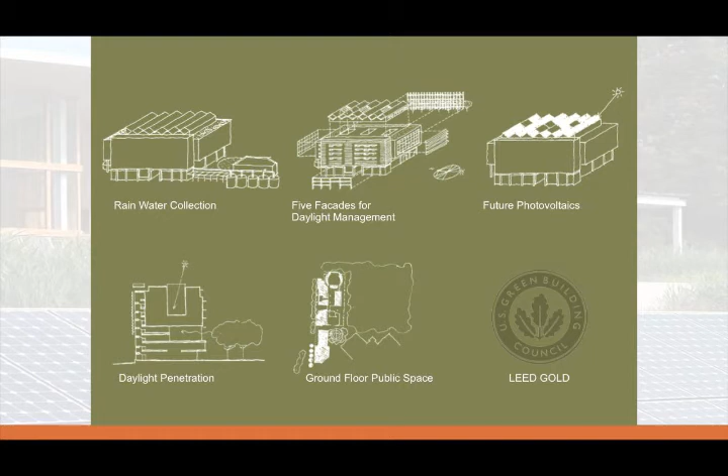So we can say the same things here—we can save water like we can save energy. Okay, so that's those slides. There's more to come. Any questions on these? John?

We had a gentleman from Vienna, Austria last year who did a presentation at the local C3 council, and one of the things he said amazed me about that city. It's considered one of the most livable cities in the world 4 years in a row, or 4 of the last 10 years, and every commercial building there has a plaque or statement showing the energy and water use of that building when you go in. So everybody is aware of the utility and how much energy and water is used in that building, just like they're doing here with BNIM. Why aren't we doing that with every single building here in San Diego and in California? Just a question. You gotta put it into the code and require it.

So daylighting strategies are a little more inventive today, and they have something they call solar tubes. Anybody not heard of a solar tube? They're made in Vista. There you go. What it is, is highly polished aluminum, with a little dome. It's actually right here, and it has a shaft to it, like you took a dome, took a garbage can, and lined it with really shiny reflective material.

Interestingly enough, it illuminates this whole room most of the day because the sun moves around the sky, so you've got natural daylight coming in this, what could be a skylight, or a window, or some kind of sky window. And they actually have it so you can have a light inside of it as well, so that at nighttime it can continue to light the room the same way, and it still feels like daylight, especially if you use LED. It has the capacity now.

How many know how they painted the inside of the tombs in the pyramids? What's the key word? Mirrors.

So you can take that light and reflect it, and go horizontal 10, 20 feet, and then go down again, and you can still get the benefit. Frankly, my brother put one in his house, in his entry foyer, and it's too bright — like a hospital surgical ward. So you can benefit from angling them and bringing them into other rooms.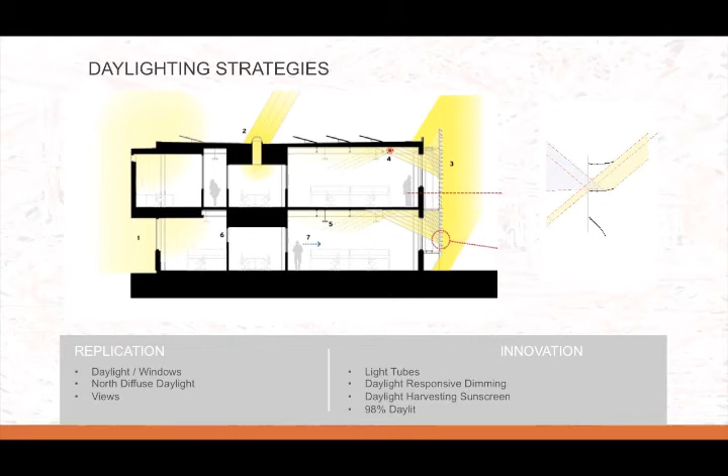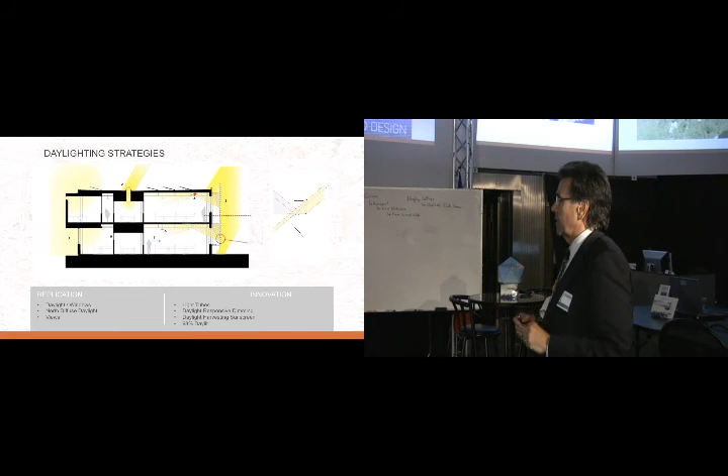We're working on a building now that's built up against a hill, 4 stories, and the bottom 2 floors don't have any windows or lights. So we're going to bring in solar tubes, a whole series of them, at least one in every room, so every room has natural daylighting. And we're going to have a solar chimney going up the center of the building to draw natural ventilating air through all those rooms. So the goal is that every room has natural daylighting and natural ventilation. That's an example of all that.

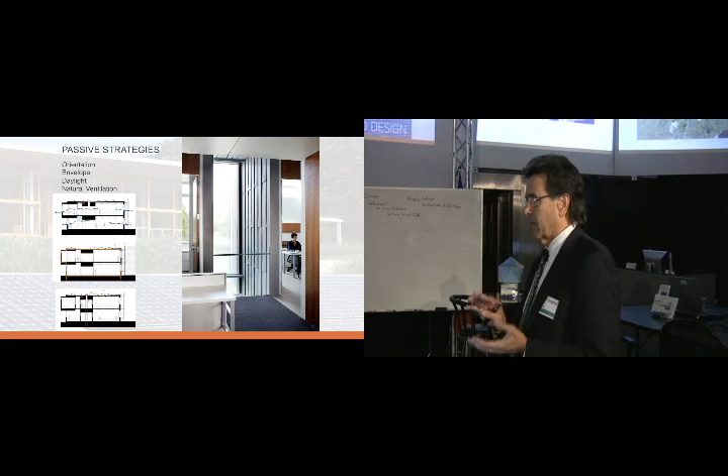Sometimes you don't want that light, so you put in solar shading devices that filter the light as the sun tracks across the sky. Some people have done movable shading devices that track the sun, which is wonderful, but they're motorized and expensive, and motors cause maintenance. We've figured out for each of the latitudes we build in an appropriate distribution of those.

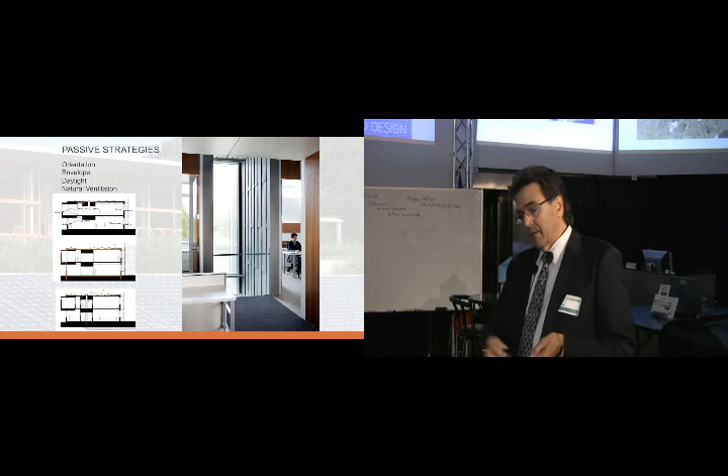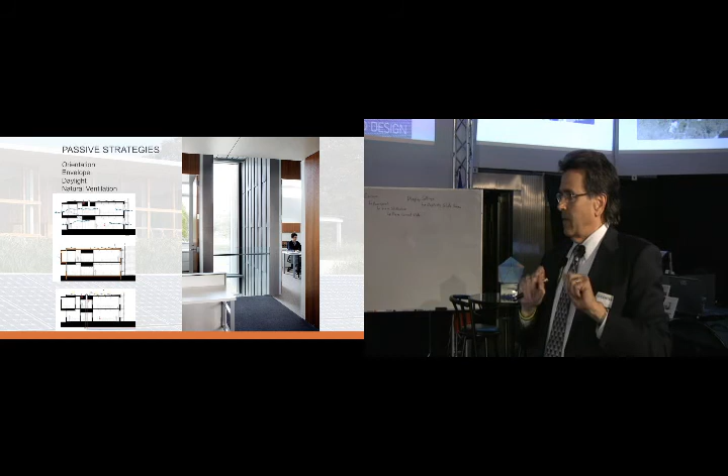Basically, they're about 8 inches to a foot wide, curved a little, and set at different angles as they go up, because we want the sun to hit those and bounce up to hit the ceiling, bringing natural daylight in without hitting your eyes. So we've calculated a way of bringing it into the building and funneling it up to the ceiling, while keeping the rest out. They're in your view, but they're not letting the direct sunlight in. And then, in terms of passive strategies, building orientation is key.

90% of our buildings follow this rule of the day: your buildings should be oriented east-west, so the south side is the long side of the building. As the sun traverses the sky, your horizontal shading devices cover the windows, giving you much better ability to manage light and solar heat gain.

On the south side you manage solar gain well, but when that west sun comes down low at sunset, perpendicular to your window, you have to bring down your Mecho shades or Venetian blinds, because there's no other way of stopping the light. Or you just don't have windows on the east and west elevations.

So what do we do? We make those the narrow sides of the building. As our buildings are rectangular and narrow, those sides are most often opaque, so we benefit from that.

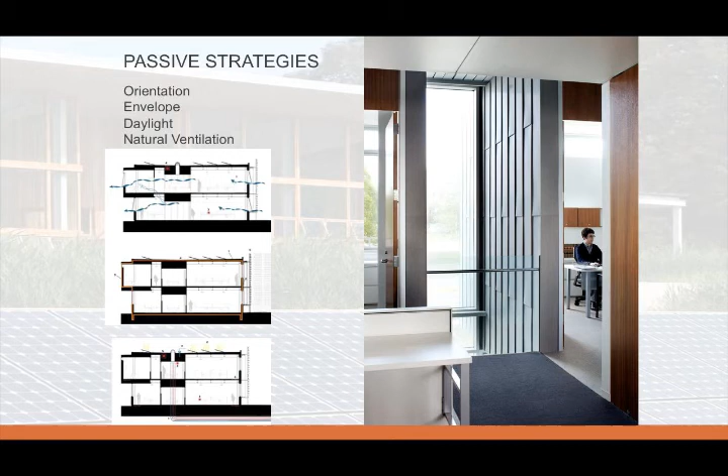If you want light to refract from the solar shading device up to the ceiling and back down onto your desk surface, so you have a sense of working in sunlight, you don't want a tall cubicle. So the cubicle part can be at 4 or 5 feet, with a piece of glass above so you still have privacy, and maybe some upper cabinets.

There's a component of replication that we use. If we've figured out a design that works and gives maximum efficiency, shouldn't we do it over? It's not that every building needs to look the same, but we take the same model that gives high energy, daylighting, and water efficiency, and replicate it. So that's what we do.

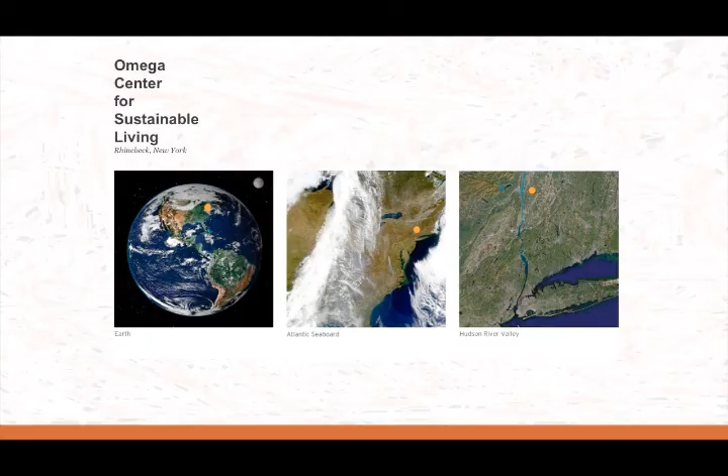This is the campus, on a dot you can't quite see, but that's Rhinebeck, New York—the Omega Center for Sustainable Living.

Because of the water element outside—there's another slide that will answer that question later—we put 36-inch diameter perforated plastic pipe over 2 acres underneath the parking lot. That's the water filtration system.

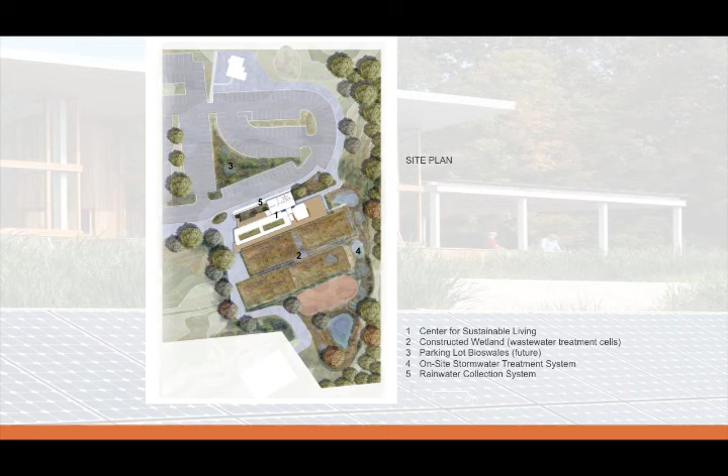That's the bioswale, under the parking lot. It goes into the ground—it's the last stage, but it purifies the water and lets it permeate into the ground underneath those 2 acres. 98% of the building is daylit.

Percent of the building that is daylit is 98%, it gets natural daylighting to it. Percentage of energy supplied by on-site renewable energy is 100%. Precipitation managed on-site, 100%, and percent of construction waste diverted from landfill is 99%. So it all stays on site, we find ways of reusing those materials.

Okay, what do you want to do? I looked at the rest of his slides, and it goes deeper into how you look at every aspect of a commercial building, water, energy, transportation, keeping it, again, reusing everything, minimizing material cost. This whole presentation will be online, so you can actually see all of these. Okay, great, so you're not going to miss it. If you'd like to preview it, you can go through that on your laptops tonight, but I think we probably hit the limit of your ability. It's a lot of information.

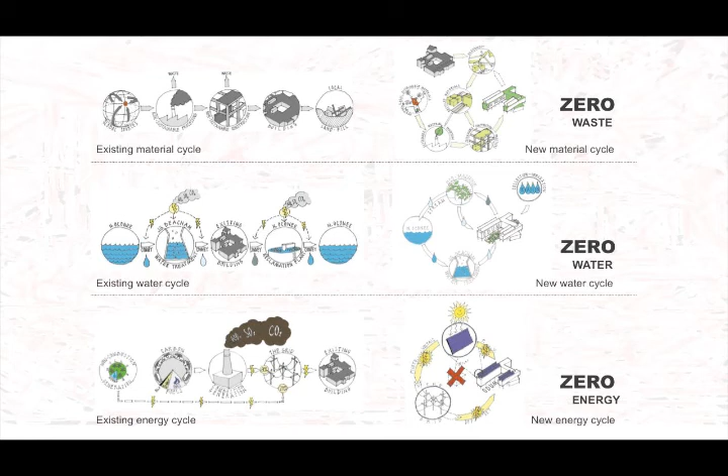So what I do want to say in closing about the water part, there are mechanisms, and if you ever say the word electrocoagulation to Dan Hendrickson, he'll talk to you for about 3 hours. But I can do an elevator speech. There are new equipment out there that can guarantee pure water from sewer. And all we need is the foresight and the emotional stomach to do that. The UT didn't do us any favors about 10 years ago when it coined that phrase, but now it's pure water.

But now it's pure water. It could have been shower to flower. Shower to flower, there you go. That would have been better.

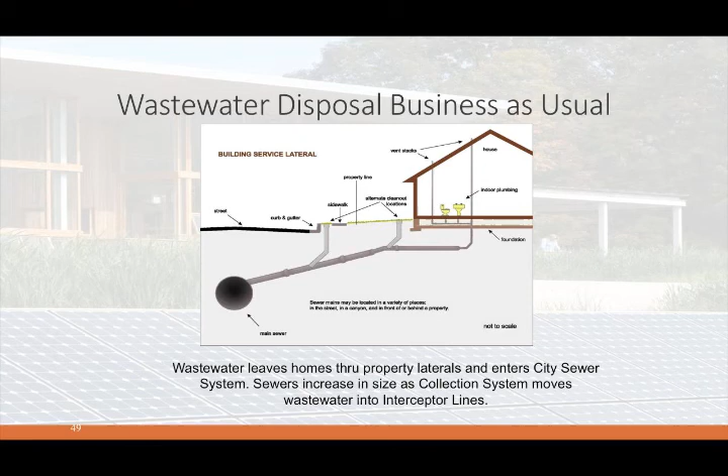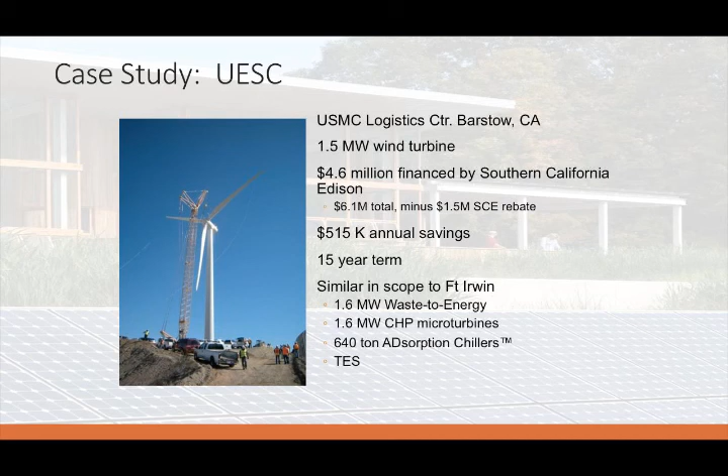Hold it close. I was just wondering, it seems to me that if you, from a residential standpoint at least, if you had, if you were off-grid, that you would save, you have a community that's off-grid, you would save a tremendous amount of cost of transmission lines, of power substations, major transmission lines, power plants. And so I was wondering what people think of the possibility for off-grid in the future.

If I could make a stab at that, any of our speakers, yeah, if I got one. So my strategy, part of some of the slides are about planning, net zero planning, which we didn't get to, but so if the school in the neighborhood has the water treatment and the PV on the school property, on the roof of the school, in the fields underneath, it can handle the entire neighborhood. It can provide net zero water and net zero PV for a neighborhood. Now you have another neighborhood with another school, and you do it again. And it's microgrid, and it's localized water treatment. And the costs of those systems are ever coming down for water. And for me, that's a no-brainer. And there's a couple of areas in California that tried it.

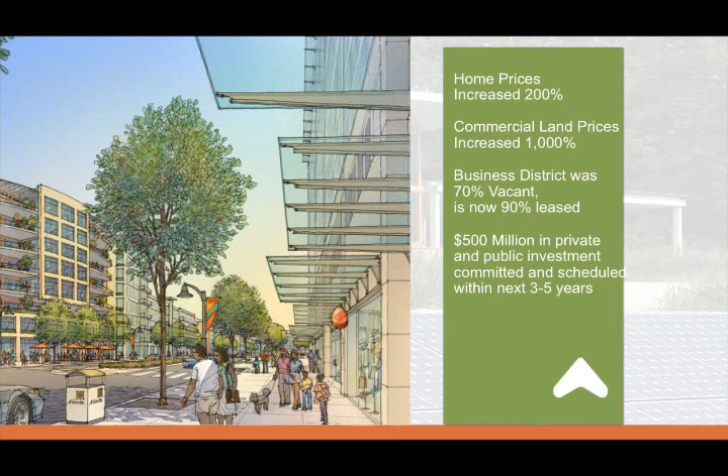Sounds a little bit like what GBC was talking about when Dan Cott talked about eco-districts, to look at an entire community and say, how do you look at the throughput of water and energy and building materials in the whole neighborhood, and say, how do we make the whole system more efficient? That's the new term for that kind of thing, it's called an eco-district, and there are actually some slides if you want to go forward and look at them. But it is about empowering politically. The biggest part of an eco-district is the community connectivity. We did one out in PB. I don't know how many have heard about that, but AIA and U.S. Green Building Council and a number of people and community groups in PB got together, and they got a grant, and they studied this stuff, and they have now submitted for formal eco-district status. That has been picked up by some of the councilmen, and they are looking into that for their own council districts. So these are things that, again, it's political. There's a lot of naysayers out there that don't believe that there's climate change. They don't believe that everything's not just the way it was. They're not allowed in this room. Eric?

So you had talked about the importance of a life cycle perspective to buildings like this. I was wondering if you could explain the importance of managing the information flow from planning through design, through build, through operation and maintenance. You have a lot of systems, say a 50-year building life. How do you keep it all straight, and how do you keep it so that the owner is going to know he's getting a good return on investment over the life cycle?